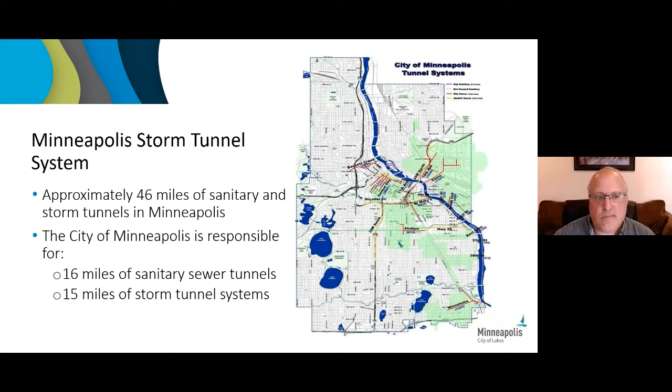Our project need: many of the city's tunnels were built in the 1880s, the 1930s, and 1940s, and at that time there was typically not as much concrete or asphalt roadways and sidewalks as we have today. So back then, some of the precipitation could infiltrate into the ground, and the rest of the runoff was able to be handled and carried by the existing storm tunnels that Minneapolis owned.

However, as our downtown has developed, we've begun to have capacity and conveyance problems in our downtown region, as many of the storm tunnels were beginning to be undersized by the development and the amount of water they were now accepting. Next slide.

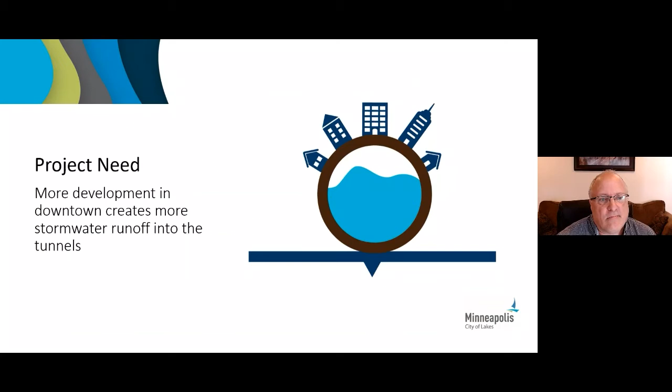With our increased rain events that we've had, stormwater is being conveyed quickly into our storm system, and we're having a backup basically of our storm tunnels, creating head pressures and problems in our tunnel, not able to convey it to the river fast enough.

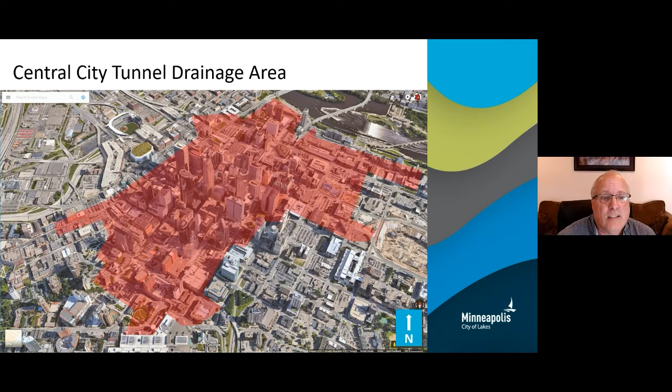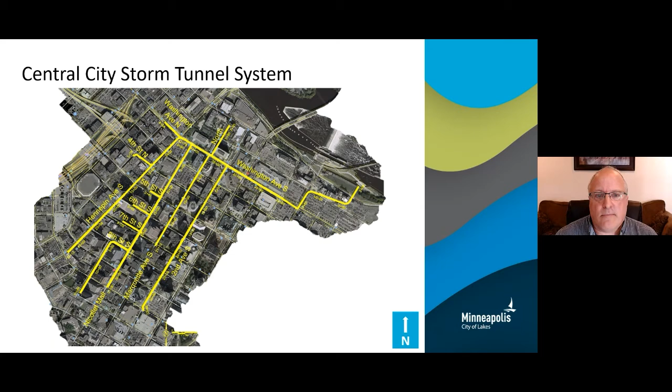Okay. Yep. All right. Pardon me for my choppiness. Bruce, if it keeps giving problems, you might have to take over a little bit on some of these slides.

This slide shows basically our current existing downtown tunnel system. In yellow, there's 4 main collector tunnels in our downtown, under Hennepin Avenue, Nicollet, Marquette, and 2nd Avenue. These drain directly into our main tunnel on Washington Avenue, that eventually conveys all that water down to our outlet, near our Stone Arch Bridge.

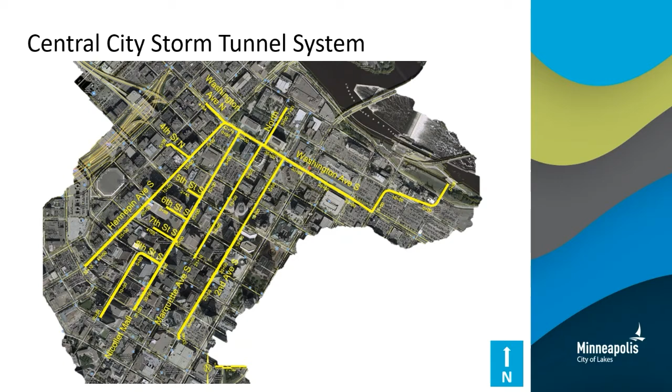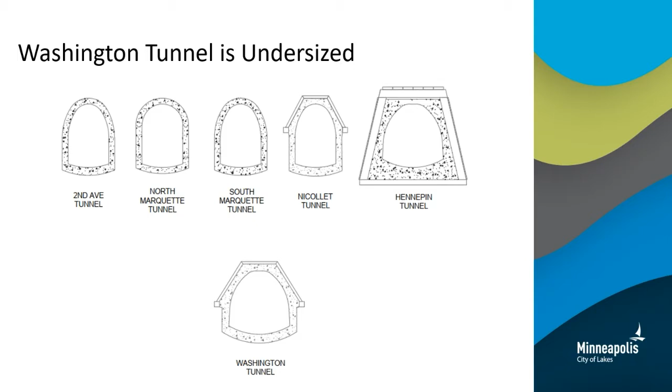The issue with our stormwater tunnel is that our tunnels are backing up with water. As our tunnels and vertical shafts fill with water, it's creating what's called head pressure down in our tunnels. Water being incompressible can literally fracture the 12 inches of concrete tunnel liners that our tunnels were constructed with.

Once the tunnel liners are fractured, water will force its way through the cracks or holes that are created and act like a high pressure washer, which will erode the sandstone bedrock outside of the tunnel. It causes a massive amount of loose sandstone to be mined and oftentimes fall back through those cracks and pile up inside our tunnels, causing less capacity and requiring maintenance to clean up that sand and repair the cracks or fractures caused by that high pressure.

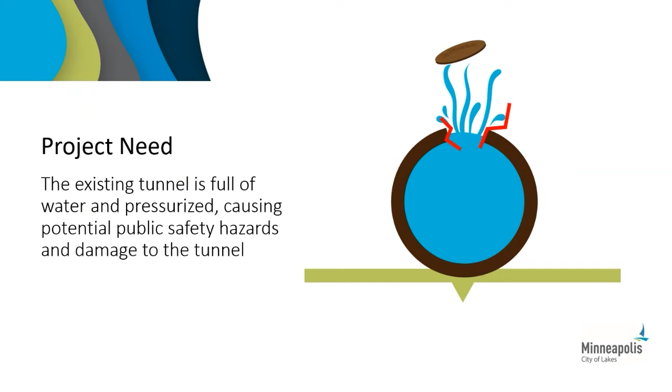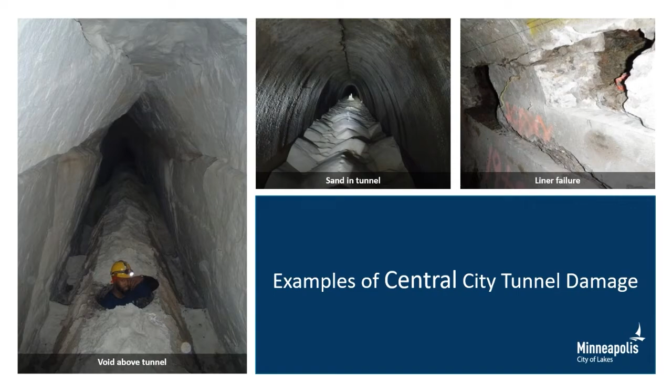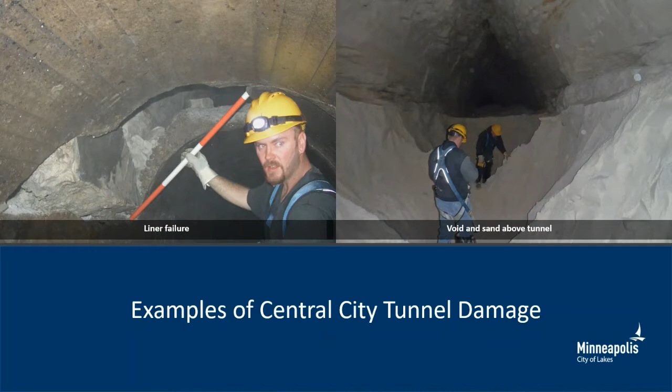Another picture on the left shows fractures in some of our tunnels because of this high pressure. The picture on the right shows us standing in the tunnel under this water pressure, and the sand all around us is the sandstone that has loosened and is falling back into our tunnels. We also have to fill that huge void above our tunnels. It's a tremendous maintenance issue, high cost, and that's one of the reasons we have to go about helping alleviate this problem.

So our solution basically to the capacity problem is to create a new tunnel, what we call a parallel tunnel to our existing tunnel under Washington Avenue. That's not necessarily to scale, that new tunnel - it's actually much bigger than the existing one. It'll increase our ability to convey and bring that water quickly to the river, and thus alleviate pressure in the rest of our tunnel systems under 2nd Avenue, Marquette, Hennepin, and Nicollet. The city has hired CNA, a local tunnel consulting firm, to help evaluate and design a solution that makes economic sense for the city with the greatest benefit of reducing pressures.

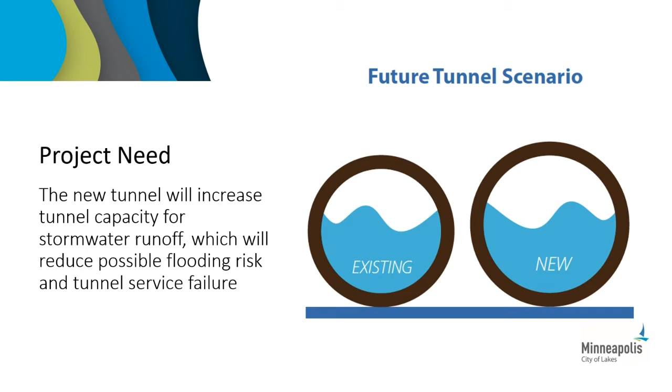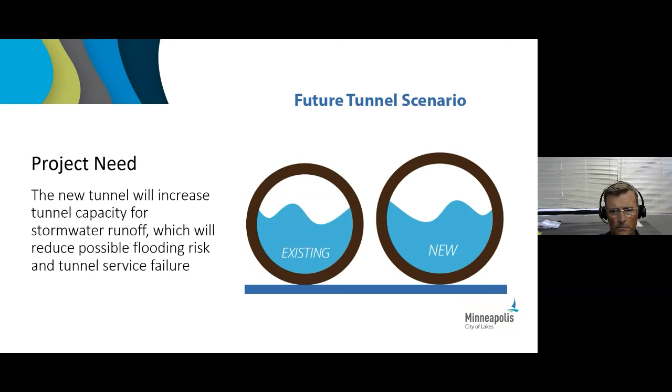Hey Joe, before you turn it over to Bruce, there's one question from the public. Maybe you can answer before you turn it over, and I'll read it to you: Will this project eliminate the horrid odor coming from the sewer grates along Washington Avenue near Zen Box, as well as the stagnant water at Mill Ruins Park?

Okay, good question. Our project, being that it's a stormwater project, will alleviate our stormwater issues. The sanitary sewer smells you're smelling, likely by Zen, are caused by the Met Council's sanitary sewer interceptor, a large sewer interceptor at that location. Depending on the air pressure and if it's venting off their sewer system, it'll be noticeable at street level because it travels somewhat through our stormwater system. So unfortunately, that won't be alleviated by our project.

As far as the stagnant water at the river, when we have large storm events, our tunnels drain quickly and we don't have a lot of standing water in our tunnel system. That typically would be caused, I'd say, by the amount of water the park board is putting through that little canal area they oversee down by the Stone Arch Bridge.

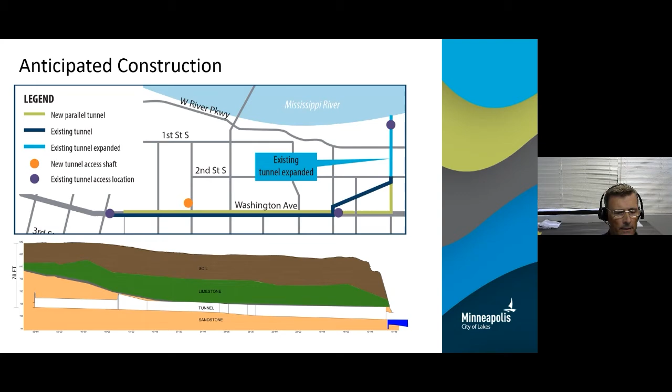Talking now about the river portal site. The Mississippi River is in the north, shown in dark blue in that photo. You can see the Mill Ruins Channel on the left side. The red dashed line is the work site, which will have a site fence around it for access.

The road and the parking lot down in the park will be closed from the start of construction, roughly September, through the spring of 22. It'll open back up again for the summer months, and I'll get more into the schedule there. Basically, in the summer the road and parking lot will be open. In the fall and winter it will be closed.

The trail coming down the hill will remain closed for the duration of construction, but the trail just to the right, the curved one coming down the hill, will be open again in the summer.

There'll be dams built in the Mill Ruins Channel in the yellow hatched area to dry that up and keep the river and the channel flow out. Then there'll be an open cut excavation, open to the sky, in the light blue hatched area. The tunnel itself, at the bottom of that light blue hatch, will be mined underground, heading south towards Washington Avenue along the Chicago Avenue alignment.

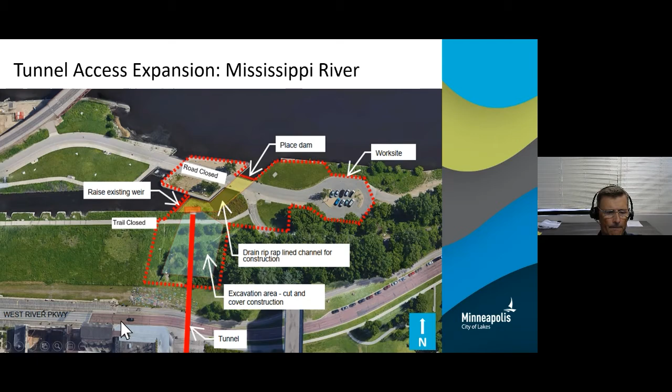Let's go to the next slide.

Let's go to the next one.

This is the access on our work sites on 2nd Avenue. The river is to the north, off the top of the page. We're going to be building a new shaft there.

Right there, a new shaft—that's the 12-foot shaft. There'll be a tunnel from there out towards Washington Avenue to connect with the main new parallel tunnel. The work sites, hatched in the red crosshatch pattern in both areas, will be fenced off with a noise barrier and some screening with graphics on it.

We're going to maintain traffic in both directions, one lane each way, as shown by the red arrows. There are 2 bus stops on the west side of the road that are in the work site areas; they'll be consolidated into one bus stop between the 2 work sites. The bus stops on the east side of the road will remain.

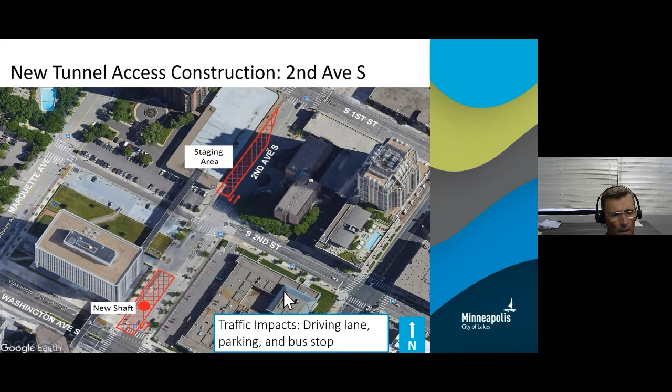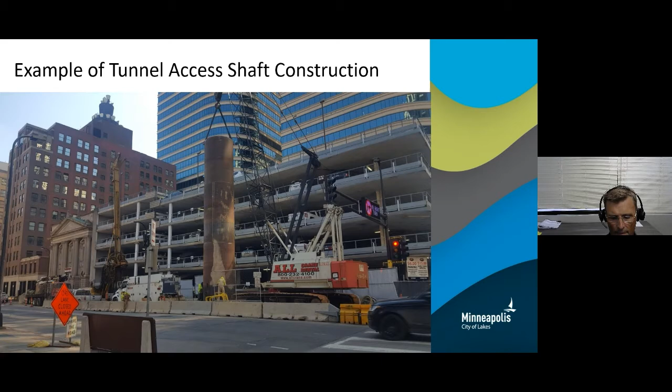So this is Portland Avenue at Washington Avenue, the river again, so to the top of the slide. The red hatched area is going to be the site fenced off with screening and a noise barrier on the north side of that. We're maintaining 2 lanes of traffic on westbound Washington Avenue. The bike lane and parking meters will be closed in the hatched area.

And again, this is a 7 a.m. to 7 p.m. Monday through Friday, 9 to 5 Saturday work site. Next slide.

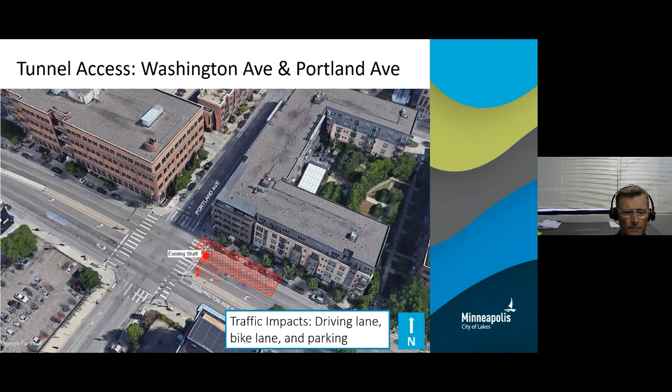Now we're down at Hennepin Avenue and Washington. Again, the river's to the top. There's an existing shaft there that will be used for access. The work site will be all on the sidewalk. The bike lane and traffic lanes will remain open. Again, 7 a.m. to 7 p.m. Monday through Friday, 9 to 5 on Saturday.

And all these sites will have a crane to lower materials, equipment, and personnel down the shafts. There'll be trucks going in and out. The bigger shaft on 2nd, more so in Portland, they'll be hauling sand when they're mining the sandstone. We think up to 20 or so dump trucks a day when they're going full bore.

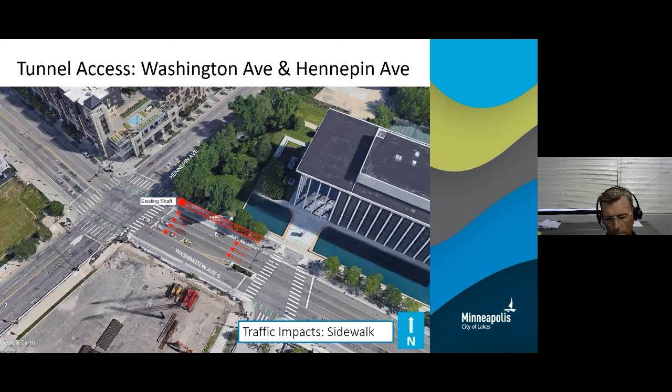Next slide. In addition to the work sites we've just been talking about, there's going to be up to 10 dewatering wells. We're roughly 10 to 15 feet above the tunnel floor in terms of the groundwater table and the sandstone, at the wettest. So we have to lower that so we can do dry construction. There are 10 wells shown here. We anticipate 5 for sure, supplemented as needed. The 5 are at Nicollet, 2nd, 4th, Portland, and Chicago. The others will be put in as needed.

Preliminary indications are that each will take 2 to 3 weeks to install. So there'll be a drill rig set up to drill those wells for 2 to 3 weeks at each of those sites.

Next slide. Hey Bruce, before you go to the next slide, back up one. Someone asked a question, and you can show it pretty easily on this graphic. The question is, what happens to the existing tunnel once the new one is in place? So the existing tunnel will still stay in service. The city has been repairing that over the last few years, and it'll remain in service, so it enhances the capacity of the whole new system.

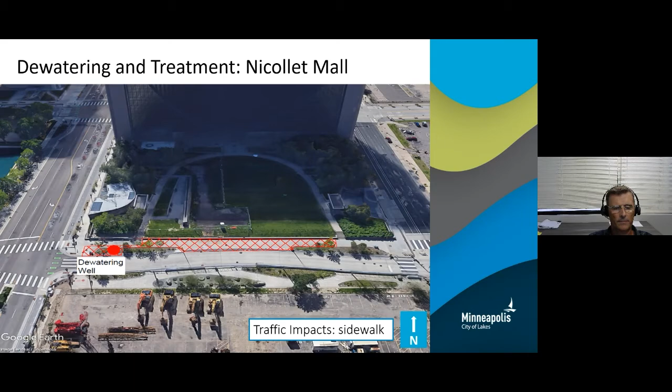Next slide. To talk about the schedule for the project: dewatering wells will be installed this fall into winter. The 2nd Avenue vertical shaft will be built this fall, September through November. Then they'll be working from the 2nd Avenue shaft, the Portland shaft, and the Hennepin Avenue shaft from November of this year through the spring of 2023.

The open cut outlet excavation: the current plan is to do a small excavation at the river to provide access into the tunnel in September and October of this year, finishing that off in December 2022, continuing through May 2023, with restoration in May and June of 2023.

Hey Bruce, there's one more question. If Faith can flip up the map showing the tunnel from beginning to end. The question is: do you anticipate noticeable noise or vibrations specifically at the North Star lofts at Portland and Second? Point that out, Faith, Portland and Second Street. So it's right there on Portland Avenue, kind of away from us, a block off of our construction, so not much noticeable there.

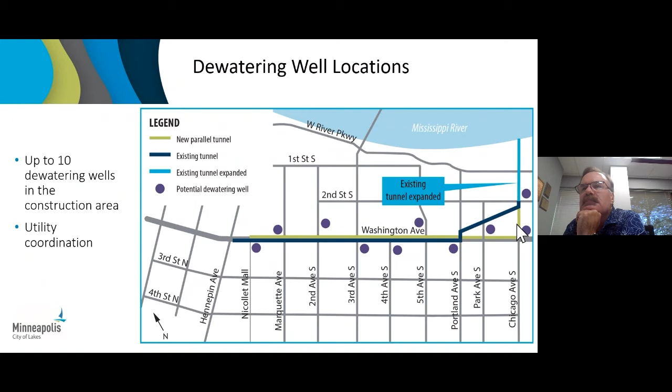I don't have a slide right now that shows specifically where that is, let me check my other screen. I believe it's on the south side of Second, isn't that correct, Bruce? Yeah, I believe so. So it's not going to be on the Chicago Mall or the mall area on the Guthrie side. Right, that's right, Joe. But once it's installed, it will be similar to the picture Bruce showed of a dewatering well with a chain link fence around it, fairly minimal visual impact, and certainly minimal noise as well. It's not a noisy operation.

I do not see any other questions at this time. There's another one coming.

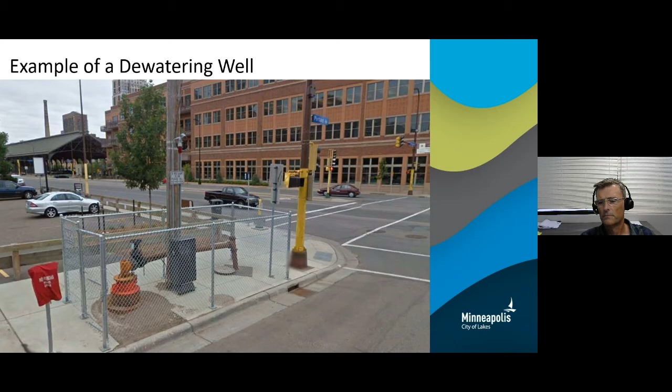Now there is another question: the July 2020 presentation had dewatering wells on the southwest corner. She must have been talking about our last figure, if you could flip that one up, Faith. So yeah, that well there at Chicago should be on the southeast corner. I mean, the southeast corner is where it's currently planned to be. So the figure doesn't have it in the right spot. I'm looking at the construction drawings on my other screen, and it's on that southeast corner.

This person was asking, it used to be on the southwest corner and now it's going to be on the southeast corner, is that the answer then, okay? Yeah.

I don't see any other questions at this time. Every time I say that, then there's another one. All right, two more coming.

So the question is: if it's in the southeast corner, will that impact the farmer's market going forward? Can you point to where the farmer's market is, Faith? Basically under the light blue line, right? And the well will be next to the dark blue line, across the street, south side of the street, north being up on this map. So east of Chicago and south of 2nd Street.

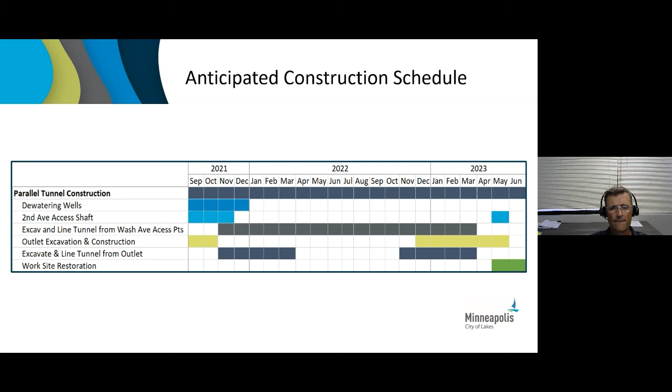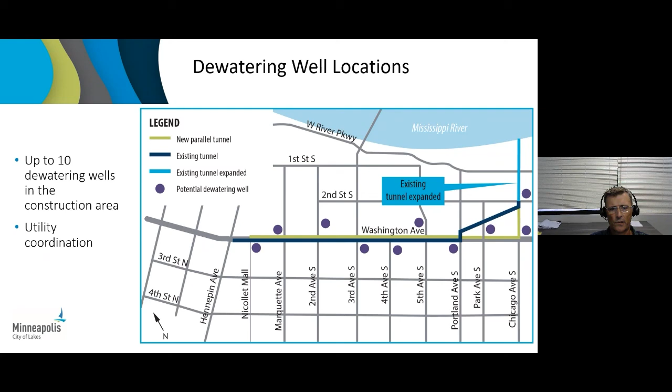So Faith, can you show the map again? Yes. So at the river site, if you could point to that. Probably a different map, isn't there, Bruce? Yeah, I wanted the beginning would be better. Yeah, this one, this one's fine. So the purple dot by the river, you could point to that, Faith.

That site down there is 24 hours a day. The other main access points from the surface are the purple and orange dots on Washington Avenue. That's 7 a.m. to 7 p.m. Monday through Friday, and 9 to 5 on Saturdays.

And Bruce, again, just to clarify, the portal site at the river, that will not be year round. That will be predominantly winter, November to April months. There will be some site prep and things down there, fencing this fall.

Bruce, can you clarify one more time the times? You said 7 a.m. to 7 p.m. for these sites on Washington Avenue, Monday to Friday, correct? Yep, and 9 to 5 Saturday.